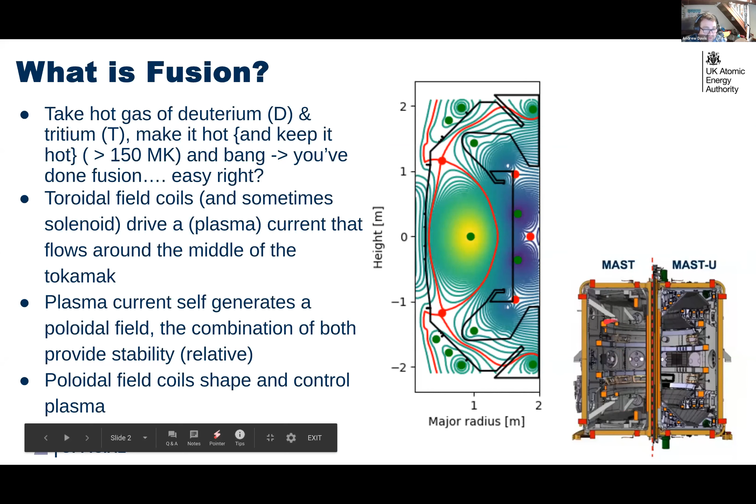The main components are some large toroidal field coils which sit around the tokamak, the poloidal field coils. The combination of both gives you stability and control. The PF coils, these ones here, for example, are used to shape the plasma. Just to give you an example of what one would look like,

if my internet connection is going to behave today, very good.

Ultimately, in a tokamak like MAST, which is a very open configuration, you have poloidal field coils inside the tokamak. You have toroidal field coils outside of it, and the central solenoid down the middle. And any stuff that does escape is going to impinge on these various bits and pieces of wall. Otherwise, the other major engineering component we have is the divertor, which is this big chunk of material, usually at the top or bottom. It can be both in this case. This is known as a double null configuration.

And these components are designed to deal with extremely high heat loads. As a side note, this particular design of divertor is called a Super X divertor. This allows a large expansion of the magnetic flux lines down here, which allows the incoming heat flux to be distributed over a much larger area, which would otherwise be concentrated into a much smaller area, which makes the design of components challenging or impossible.

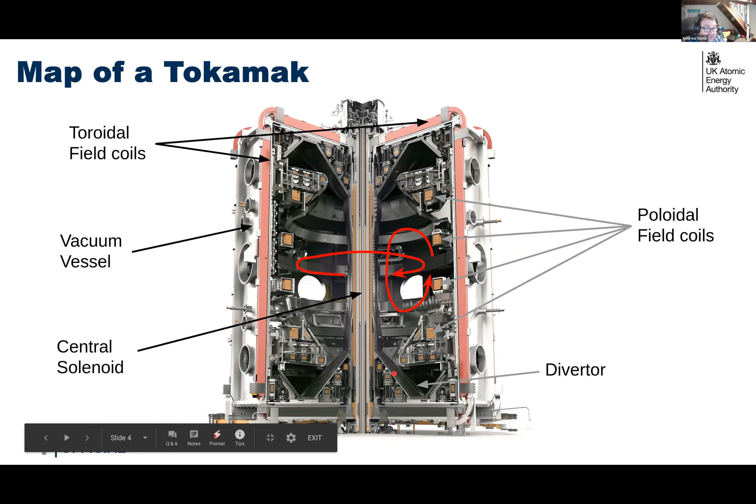But in terms of what is going on, the energy from the plasma mostly comes out in the form of neutrons. These neutrons, despite having a small magnetic moment, do not feel a magnetic field and largely go uninhibited straight into structural materials, where they deposit their heat over a relatively large volume.

That power, ultimately, we want to do something useful with. Unfortunately, because of that savage Carnot, we lose an awful lot of the energy just in lost efficiency. And ultimately, for this fusion power of 2400 megawatts, we end up with 625 megawatts. So really, what we're worrying about here is all this power that's produced that is not going towards electricity has got to go somewhere. And that's largely what we're going to worry about here.

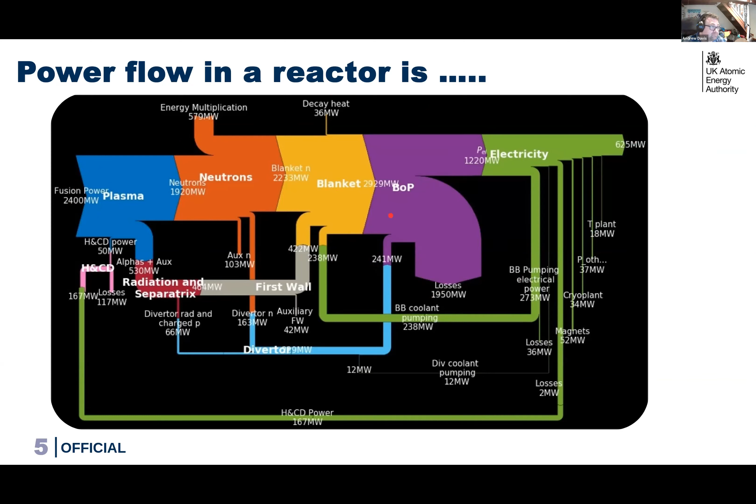We have lots of energy stored in the magnets. In this case, these are the ITER toroidal field coil magnets. You're seeing the large structure for them. They have total current in them upwards of 70 megaamps, forces upwards of half a giganewton. There's an awful lot of crosstalk between the coils.

The coils themselves are superconducting, so they are cooled to about minus 260 something Celsius, to liquid helium temperature, where they are superconducting. They are quite complex in shape. And just as a side note, it took the entire world's superconductor production for something like 8 years to produce them all.

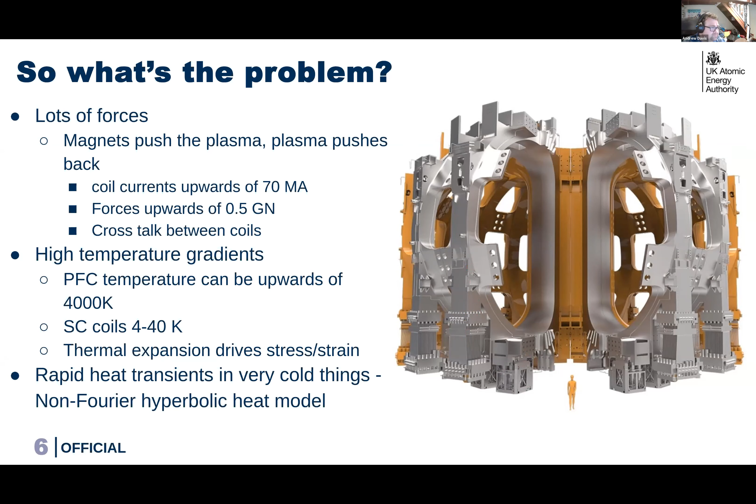At the first wall, somewhere in the middle, where the bright bit is, your plasma-facing components can be at temperatures upwards of 4,000 Kelvin. I'm not sure if Ben mentioned it, but the core of the plasma can be upwards of 150 million Celsius. You get to the first wall where it's about 4,000 Kelvin in certain parts, and then to the superconducting coils, which are at 4 Kelvin.

So a large part of our material problems are driven by stress and strain from thermal expansion. Radiation damage, of course, induces an extra source term in terms of stress. And particularly for magnets, rapid heat transients in very cold things can be a problem, also known as a magnet quench. This is where the superconducting coils lose their superconductivity and become incredibly resistive very quickly, and all that stored energy becomes released as heat. This happens so quickly, we have to rely upon a different heat model, the non-Fourier hyperbolic heat model.

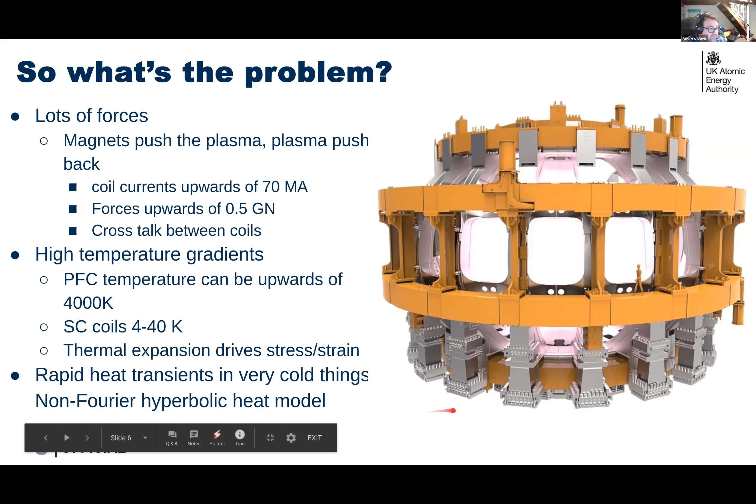Further, we have blankets or liquid metal divertors, if we're feeling really fancy. This leads to problems we have to worry about with MHD. So we have these fairly large, relatively slowly flowing liquid metal concepts, but that's not the only concept. There are other liquid metal concepts we can consider. And certainly one of the more preferable divertor concepts would be a liquid jet of liquid metal. That would be a very nice kind of divertor.

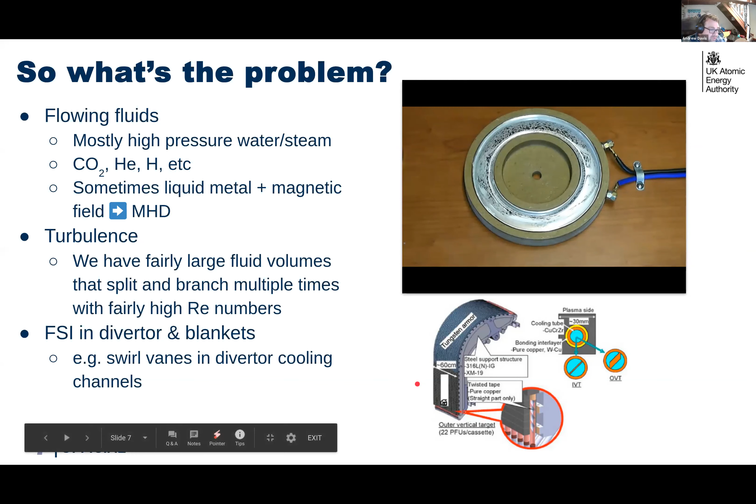Of course, you have to worry about turbulence in terms of fluids. So we have, in some concepts, gas coolant. We have, in some cases, water coolant. In other cases, we have combinations of CO2, helium, liquid metal. And some of these can be quite turbulent flows sometimes. And certainly in the case of some of the more detailed components, we have to worry about fluid structure interaction inside some of these components.

Further, in terms of heat sources, the plasma, of course, releases heat in the form of charged particles and radiation. Charged particles leaking from the edge of the plasma. We have neutrals, which can be fast neutrals, that can impinge on the wall. We're going to have neutrons, X-rays, gamma rays. This tends to be distributed over a large area, or it can be very concentrated. So in the case of the charged particle heat from the plasma on the divertor, we're talking between 5 and 20 megawatts per square metre for survivable scenarios.

But there are a certain number of off-normal scenarios, for example, runaway electrons, which can cause tremendous amounts of energy to be deposited. The electrons end up getting accelerated to energies of about 20 MeV and slow down very quickly when they hit a tungsten wall, but there's also a lot of X-rays produced, which is an awful lot of energy being deposited in one space.

The neutrons, as I mentioned earlier, carry the bulk of the energy from fusion, so 80% of it. This is really quite important because not only are they the source of many of our problems, they also are used to breed the tritium fuel we actually need. So a combination of the radiation damage increases the stress and strain. We also have nuclear heating, which is a source of thermal expansion. And further complications with the neutron interactions can increase that energy deposition from neutrons by a further 50%.

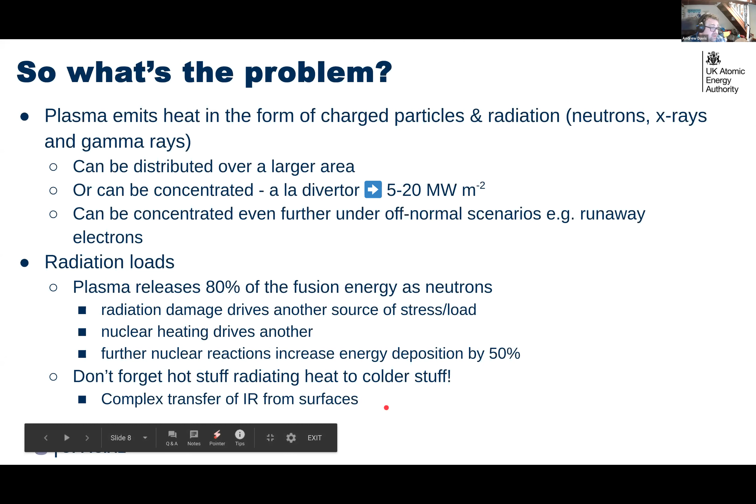And of course, one of the things that's often forgotten about is infrared radiation in the case of emission from a hot surface on the inboard, say, to the outboard. In terms of vacuum, we have other problems. So as Ben mentioned, we can follow the particles explicitly in this case because the vacuum is so good, with a molecular species model, essentially ray tracing, to work out how good our pumping efficiencies are.

We also have to worry about tritium permeation. So although tritium will be released from the plasma sometimes and get stuck to the walls, it will also be produced in the blankets. And really, if we want to be good at predicting how much tritium is produced from a particular design, we need to get good at actually following the tritium where it goes, when it gets stuck into coolant flows, when it gets embedded in materials, and how it comes out.

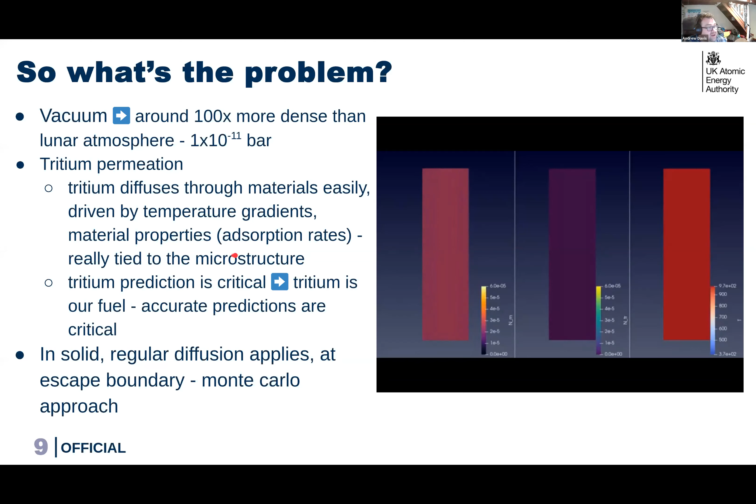Further, we have other material problems, so erosion. We have these interesting tungsten fuzz problems where charged particles, when they impinge on the wall and divertor structures, can produce this tungsten fuzz, which leads to these very nice fingers of tungsten being produced, which is really pretty and interesting. But what this means is you have these gaps in between the tungsten, so the heat transfer coefficient is terrible horizontally, but along the fuzz is quite good. But overall this leads to a drop in heat transfer, and because that drop happens, it actually makes the tungsten fuzz worse.

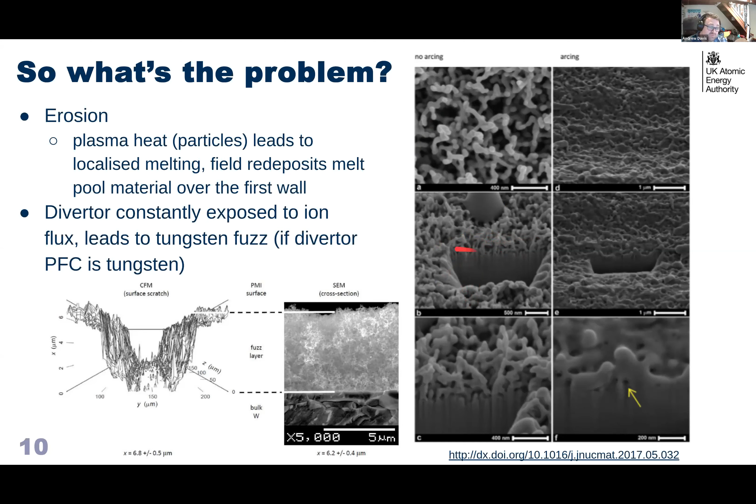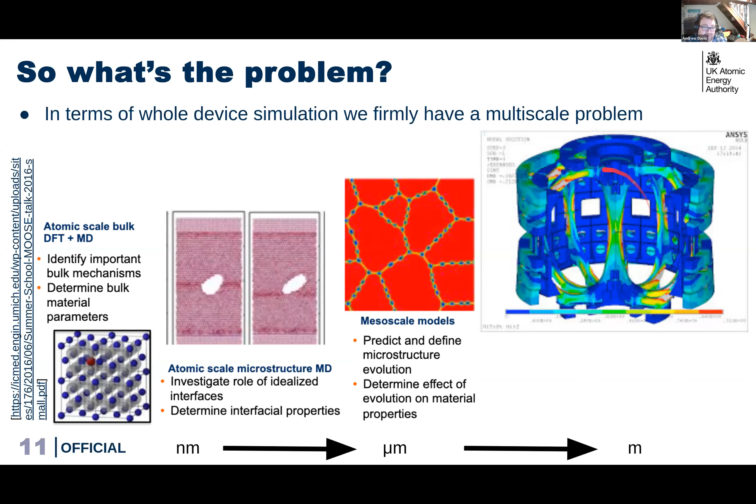So if we want to model the response of the tokamak to the plasma in its entirety, we firmly have a multi-scale problem, going from the atomic level, where neutron interactions can cause interstitials and defects, which then go up to larger models to see how that impacts a particular grain, up to how that grain moves around and impacts the macroscopic phenomena. And as Ben mentioned very kindly, with the plasma itself we also have a number of different scales to worry about, both length and time. So we have a temporal problem as well as a scale problem.

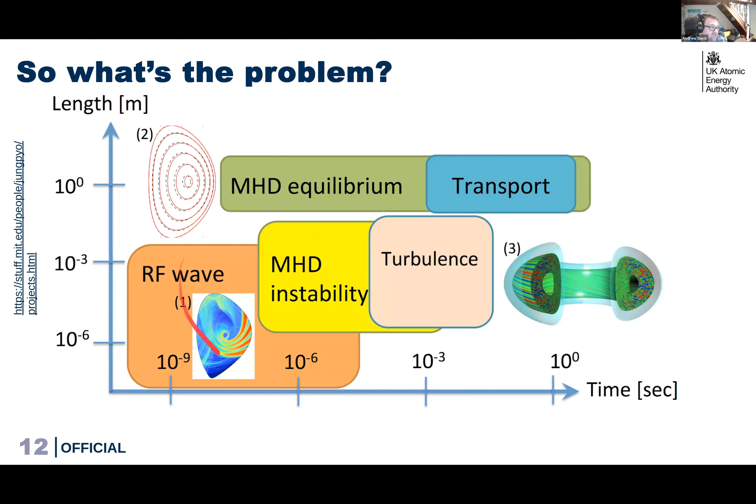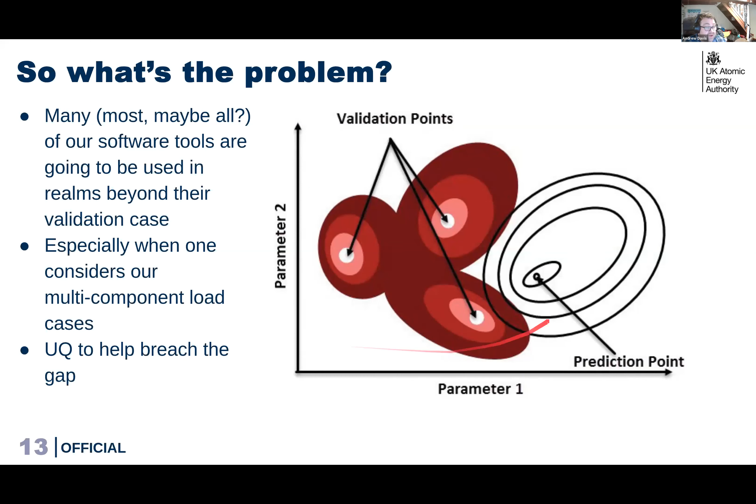A further problem is the traditional set of tools that we use are often used beyond their validation case, whether people realize it or not. Especially if you want to consider the engineering response of the tokamak, many of these tools are used when we have multiple loads, multi-component loads, and they have not undergone the appropriate validation that would be required for a safety-relevant code. And we need to use uncertainty quantification to help bridge these gaps.

So in terms of timelines in between now and 2040, I'm not sure if any of you heard, but we've been running this design study for a tokamak called the STEP project, which is to take a critical look as to whether we can actually build a spherical tokamak. The idea is by the end of 2024, we will have completed tranche 1, which is to have a concept design. There'll then be a further 2 tranches, tranche 2, where we go into detailed design and construction, and then finally the construction phase starting in around 2032 to be running by 2040.

The current plans are for a spherical tokamak-based power plant, and there are a number of siting questions currently ongoing as to where we'd place such a thing. This is a very ambitious timescale. I should note that if I draw on some important lines here, the dashed grey line is the first ITER plasma, just full stop first ITER plasma. This is the first DD plasma, I think, and sometime around 2037 we can expect our first DT plasma.

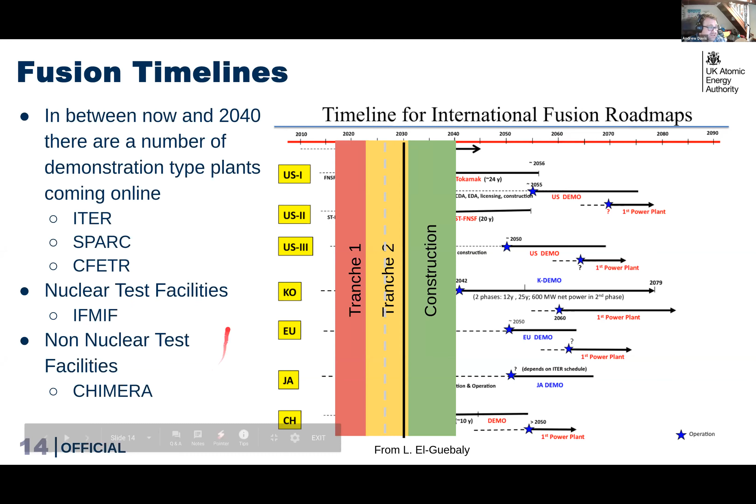So in terms of getting some validation from another tokamak that we can easily get access to, that is going to be a challenge. Of course, coming online soon, maybe SPARC in the next few years, in the next 5 years or so. We'll have access to IFMIF, which is another nuclear test facility, but that's minus a lot of the magnetic loads. We have CHIMERA, which has the magnetic loads, but does not have the nuclear component. So in terms of getting these integrated tests, these integrated validation cases, we are, for want of a word, lacking. So we need to use much more intelligent techniques to be able to actually sample the uncertain space appropriately and get validation data where we can.

So here's an example of a fusion neutron transport problem, a particular benchmark problem. So we have experiment. The blue dots and the purple dots are experimental data points for a particular neutron spectrum for a particular case. And the red lines and the green lines are the range. The green is the average. The red is the range given by all the uncertainty of all the nuclear data. So accounting for all the uncertainty in all the nuclear data, there's still not enough range to cover some of the discrepancies between the experiment and the simulation. So we are also lacking dreadfully in terms of neutron data.

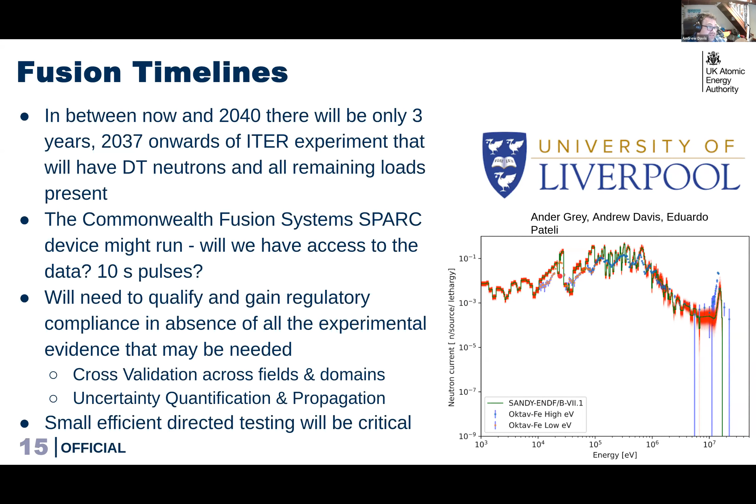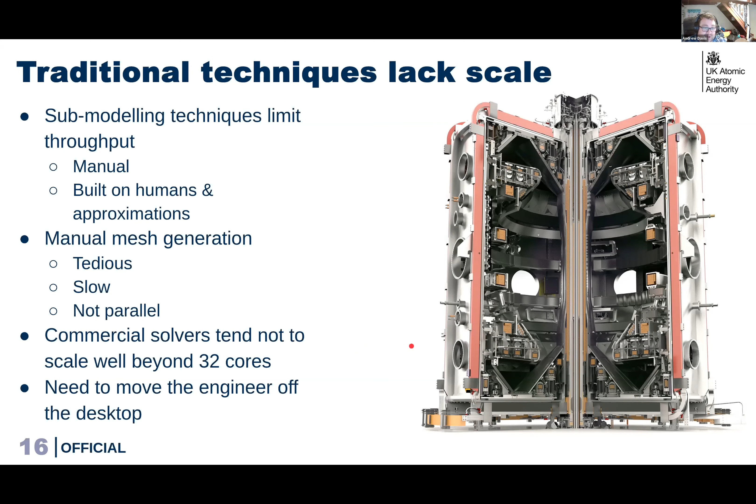So traditionally, the tools that engineers use to design tokamaks are entirely manual and are built on humans and approximations. A human will take a look at a CAD model and will simplify it on the basis of their experience and knowledge. They'll then go off with a traditional mesh generator built into their analysis package, which is going to be tedious, it's slow, and it's not parallel. So immediately, that part of the problem takes a while. It can take months to go from CAD geometry to running problem. And when you do get a running problem, these commercial solvers, which they tend to use, do not scale well beyond 32 cores. So to really make progress on how we can scale up the size of our engineering problems, we have to move the engineer off the desktop into something more scalable.

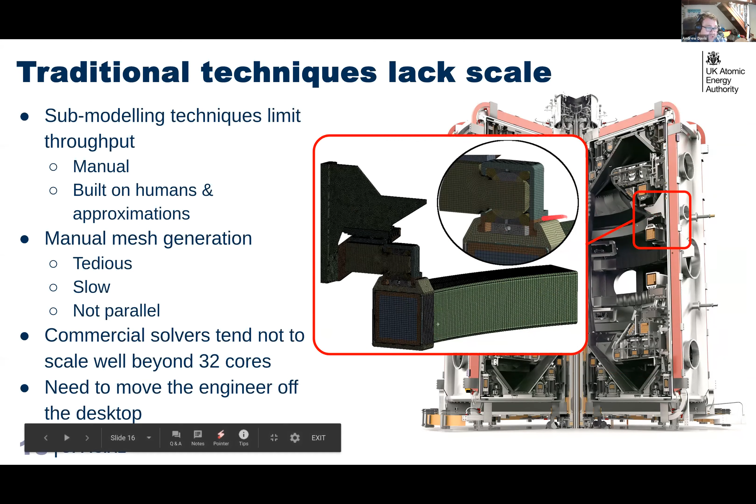If we then also want to go into this more uncertain or data-rich space, we could combine what we could do with a really performant FEA, finite element analysis system, with image-based finite element analysis. Image-based finite element analysis allows you to use neutron or X-ray radiographs to image what components really look like using very, very high-resolution X-ray and neutron imaging. So, for example, this case here allows us to take what the component actually looks like, including all the defects, where there's been brazing failures, where the material has become separated from its joining locations.

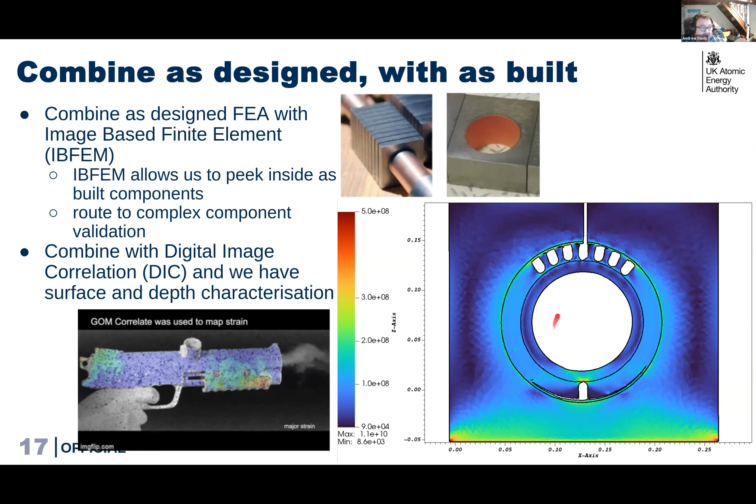If you combine that kind of capability, being able to do this kind of real FEA analysis, with something like this, which is digital image correlation, where you take a component and cover it in this speckle paint. As that speckle moves around, you can determine what the real strain is. And that's what is being displayed on this color plot when this little paintball gun fires. If you combine this kind of experimental data with this kind of simulation data, we're heading towards a really good combination to allow us to go forwards to design stuff well.

However, we already know that going towards as-designed FEA is achievable. We took an ITER port plug and meshed it using Gmsh. We wrote a special tool called PPP, which takes our relatively detailed model, this is not a full detailed CAD model, but it's relatively detailed. The full component, meshed using Gmsh, pre-processed using our special tool, and in about 1.9 hours you go from the CAD model to the mesh without having to do anything. And this is all parallelized.

So we know that we can end up with about 78 million elements. These are all just first order tets, so you can multiply that by factors of a few if you're going to go to second order tets, and then if we're going to represent that using a second order refinement in terms of the variables, we can end up with quite a large number of elements.

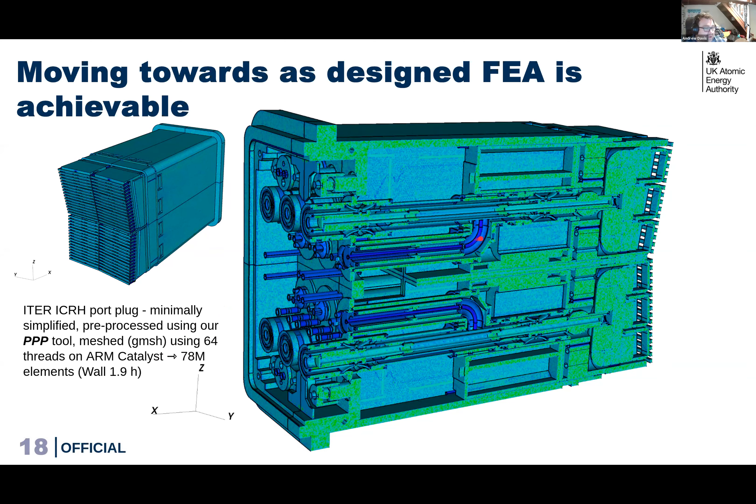But we already know from our colleagues at Cambridge that this is not unreasonable, and we should be heading towards this anyway. We already know from work done by Chris Richardson and Garth that getting scalable thermomechanical calculations is entirely possible, ending up with the order of 10 to the 9 tets on 25,000 cores. This is not to be sniffed at.

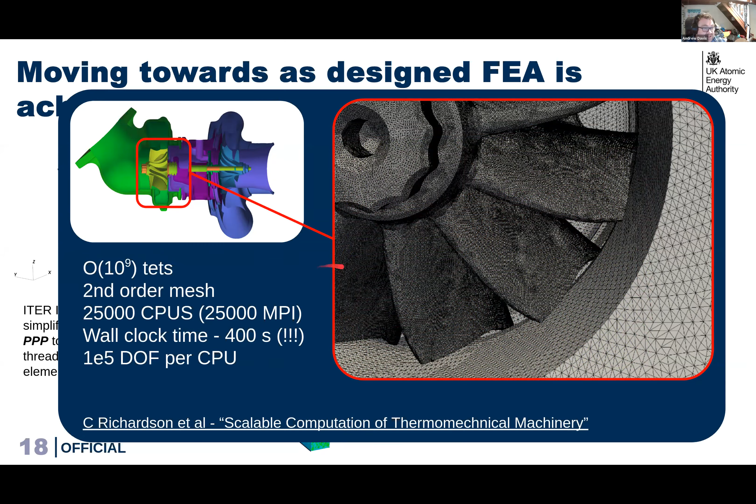There is, of course, a role for machine learning and AI, and we have lots of problems that are ripe for the deployment of machine learning and AI, particularly in terms of simulation and parameter space exploration. Our main bottlenecks in getting simulations going are mostly repairing and simplifying the CAD geometry. If you could really get machine learning and AI into that part of life, that would turn around our lives, I think.

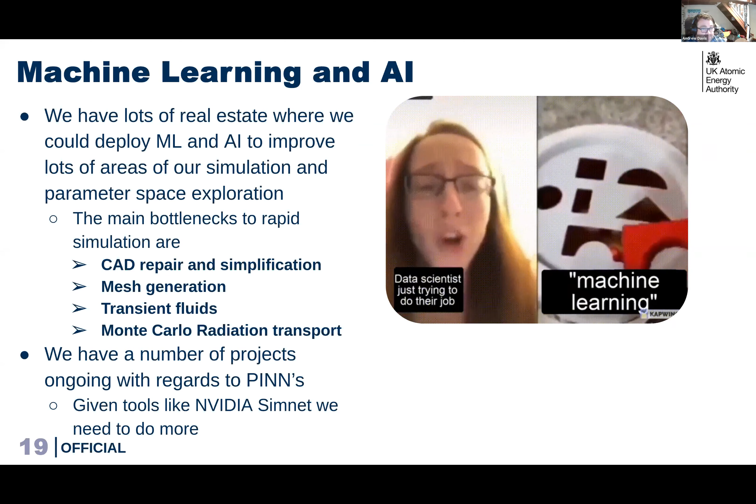Mesh generation is another good place where I'd love to see the application of machine learning and AI. Same for transient fluid simulation and Monte Carlo radiation transport. Those two parts of our simulation workflows are particularly slow in comparison to the rest of the FEA. We do have a number of ongoing projects for physics-informed neural networks, and there's been some recent interest in Nvidia SimNet.

If we combine everything we talked about, the ability to do large-scale FEA analysis and machine learning and AI, we head towards a world where we can really think about doing physics-complete digital twins, where we can really show that we actually understand all the phenomena that are going on and predict that in comparison to real life.

Here's an ongoing example from the University of Swansea, where they are going to use machine learning and AI to predict simulation results between experiments, so you don't have to do the simulations in between. And in the cases where the difference between prediction and experiment grows large, they would use more simulations to fill in the gaps.

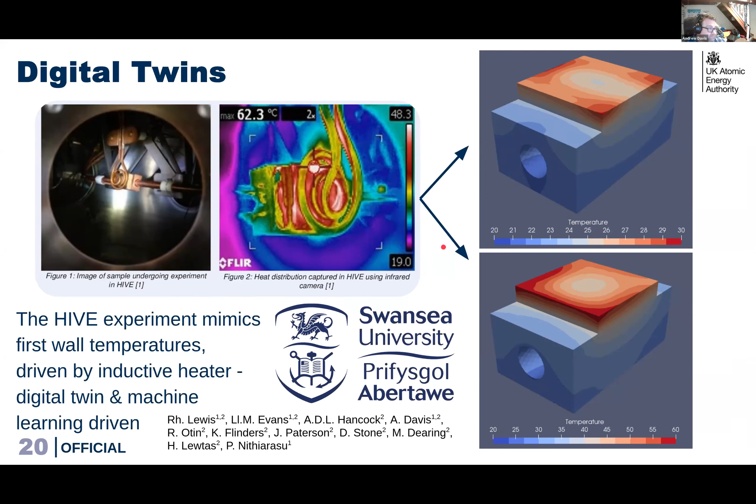So if we do want to head towards a world where we're going to simulate full physics-complete systems, we need this large, scalable FEA framework. And it's got to cover many things: computational solid mechanics, including contact and fracture mechanics, computational chemistry, electromagnetics, fluid dynamics, radiation transport. The way I imagine it is if you imagine a fusion reactor as a bunch of large stainless steel Lego bricks, everything that could happen to that Lego brick we more or less care about.

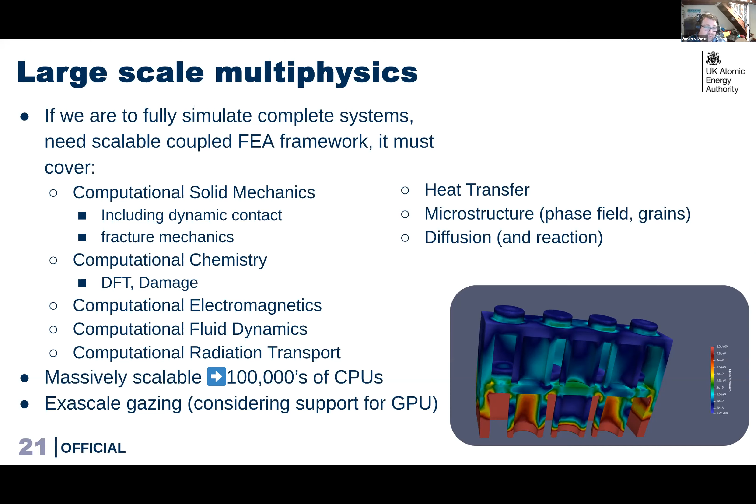We do really want to consider that it needs to be highly scalable, because if we head towards full reactors, that needs to be scalable. And we need to gaze at the exascale. We necessarily need more physics than most frameworks allow. But we do want to be thinking about how we're going to move this across to the exascale when it arrives.

So because we have this more holistic view of how we stick stuff together, we have lots of physics to stick in. We've been experimenting with tightly coupled frameworks rather than a federated model. And we do have a number of cases that warrant tight coupling, for example, this heat problem in superconducting magnets. Still figuring out what scales, what tools, what physics. But one of the key things we already know is that the engineer will be limited by where they can deploy their software. So open source, open licensing is absolutely critical for anything that we do.

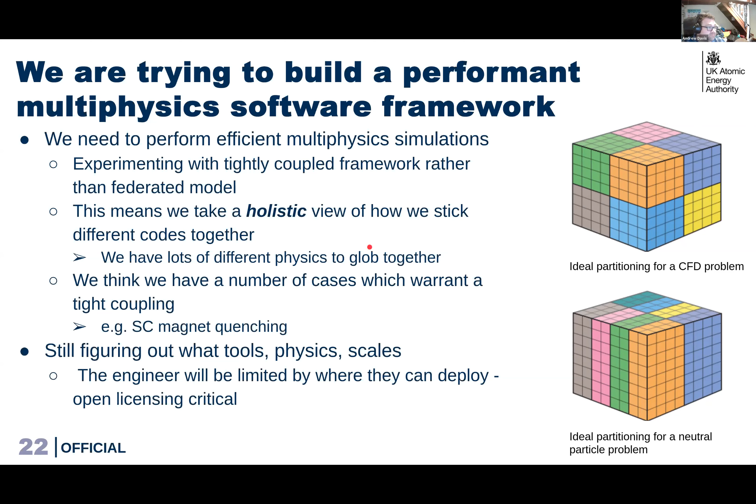We did some initial investigations. A chap who works with us called Alex Dubas looked at a range of different FEA packages, finite element libraries. We had to start somewhere. So we tried to start off scientifically by comparing performance and stuff like that. But ultimately, after comparing 37 different packages, we had to down-select on how easy it was to use, how much documentation there is, software quality, and scaling is obviously important. Memory usage is important. We ended up looking at three different libraries: MFEM, MOOSE, and DOLFIN.

And in the end, because on the STEP program we have to be application driven, we perhaps didn't take the most scalable solution. I went with MOOSE because it has much more physics that is ready to go and ready to scale, and for a number of other reasons: scale, multi-scale, other bits and pieces. That's not to say that we aren't going to consider other options in the future, but that's what we're using currently.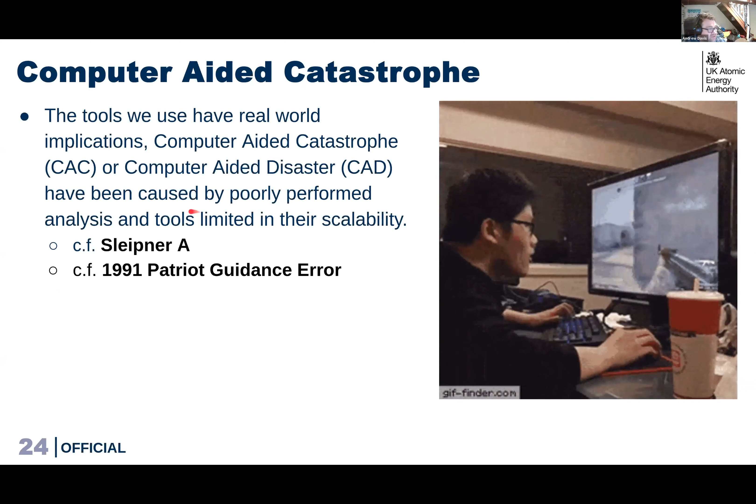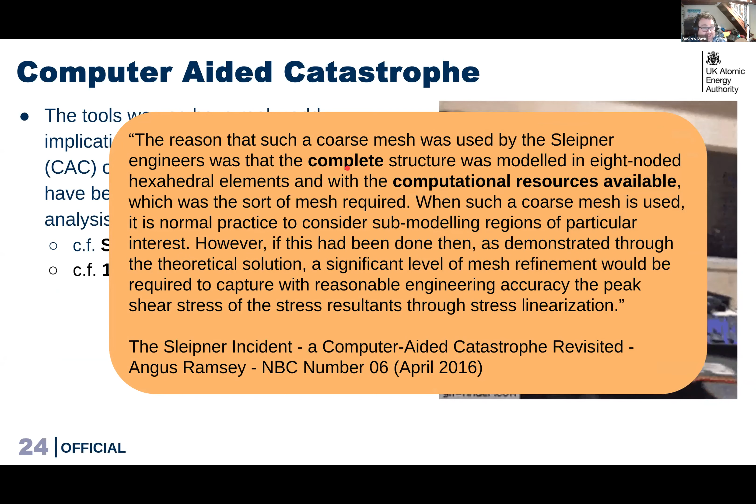So another argument for scalable FEA systems would be the Sleipner A disaster, which was caused by a blockage in terms of computational resources. Traditionally, people would use submodeling to solve one of the particular problems with this disaster, but they didn't. And if instead they had access to a much more scalable solution, this could have all been bypassed.

So we've been looking at a bunch of problems. So in this case, this is a blanket pin concept of a breeding module. Here we're looking at the temperature and velocity induced in the cooling gas to see what happens as we ramp up this flow down the middle. And it turns out the shape of this nozzle region is important. And we did an optimization study to look at a number of different setups.

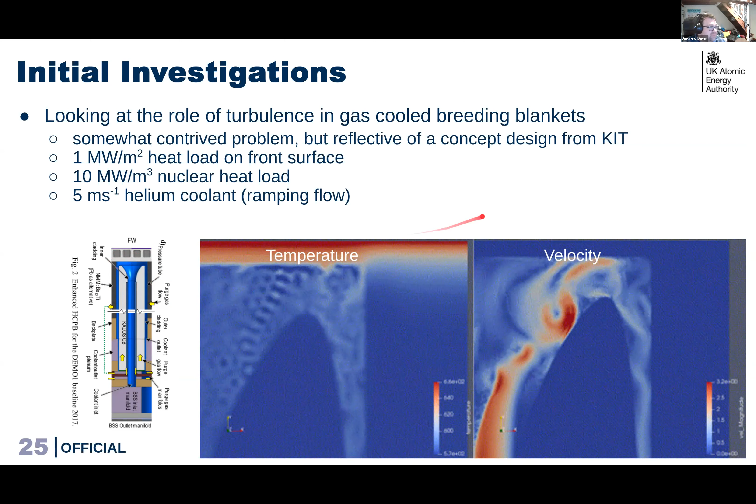Sorry, 3 minutes left over. Okay, I think I'm nearly there.

Obviously the parallel scaling is important, but what we have found immediately upon trialing out real problems is that the physics and the preconditioning really limit scalability. So when we couple in some really non-linear physics, which turns out is what most real problems are, it really hampers your scalability, especially when you make your problems all temperature dependent.

We've been using MOOSE, which is based on libMesh, which then takes this FE assembly and sends it off to PETSc. And there is a GPU-enabled version of PETSc in progress. So the hope is that it will be relatively easy to hook into those benefits. We have found that for very tightly coupled problems, preconditioning is a challenge, but the field split preconditioning really helps here. It makes problems actually quite tractable.

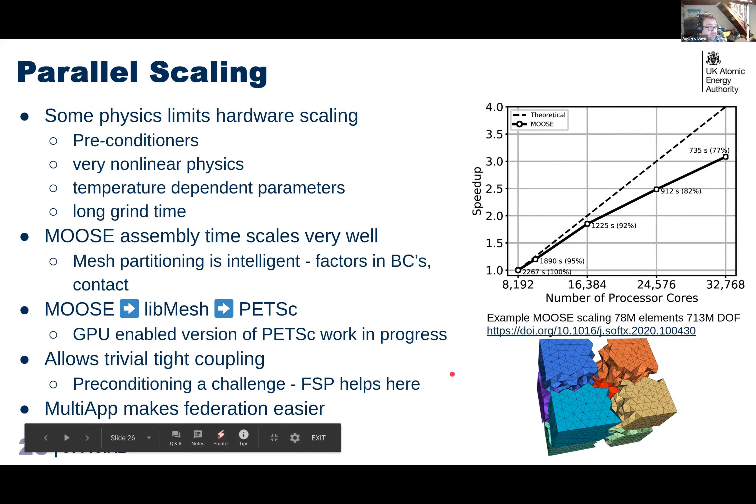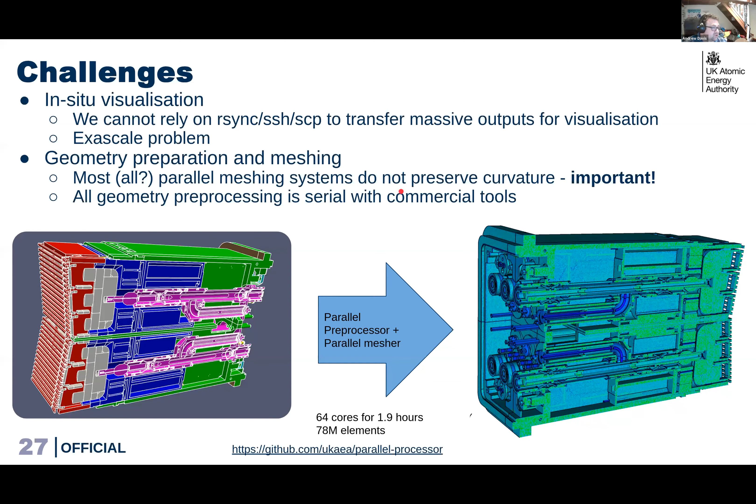In terms of problems, as we go to bigger problem sizes, this is no different to anybody else in the exascale region. We need to rely upon in situ visualization, because transferring some of these huge meshes with tens of thousands of time steps, shifting data back and forth, is not something that we can continue to do. And geometry preparation: if we could do something about speeding that up, that would really make our life a lot easier.

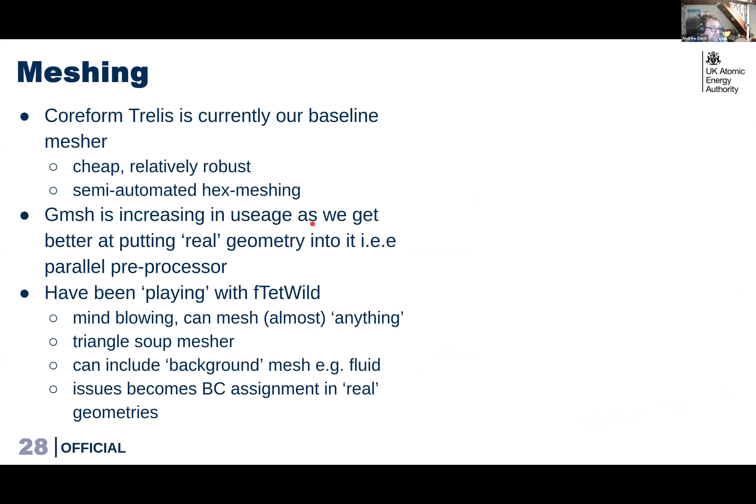In terms of meshing, we've been using the Coreform Trelis mesher. Basically, that's the starting point for compatibility with other tools. Gmsh we're getting better with, and now we can get in real geometry. That's really good. But the one that still blows my mind is a library called TetWild, fTetWild. Its tagline is we can mesh anything.

So it took 10,000 things from the 3D printing library Thingiverse and meshed them all successfully with something like 99.999% success rate. And the ones that failed just needed more memory. It was really quite incredible. You can just throw these triangle soups at it and it meshes. So I took one of my worst problems, and it failed, of course, but it's because the STL is not really valid. But it can do some really interesting things, really quite well.

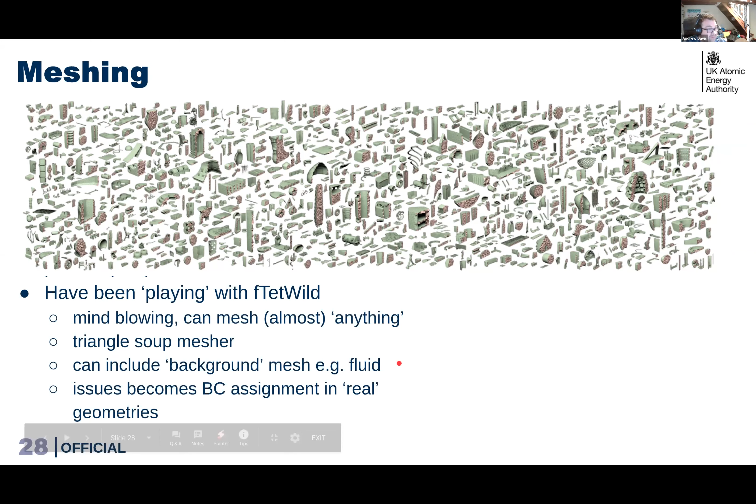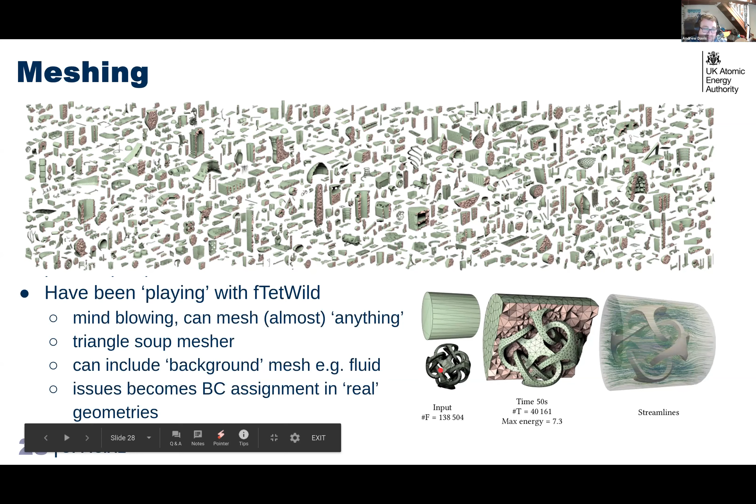So, for example, you can take your STL input and put a background mesh around it to turn it into a fluid problem. However, going into this view of meshing, the real problem becomes boundary condition assignment. When you've got complex boundary conditions for contact or for heat transfer coefficients, it becomes a real pain.

That being said, there is obviously some really interesting stuff coming down the academic pipeline. So isogeometrics is obviously super interesting because that allows us to increase our scale dramatically. Spectral HP-based finite element, again, super interesting. I think if the two were combined, that would give us a really nice framework for the future. But unfortunately, on the STEP program, we have to be pragmatic, and therefore we have to go with what's most capable now, which is why we went down the line of MOOSE.

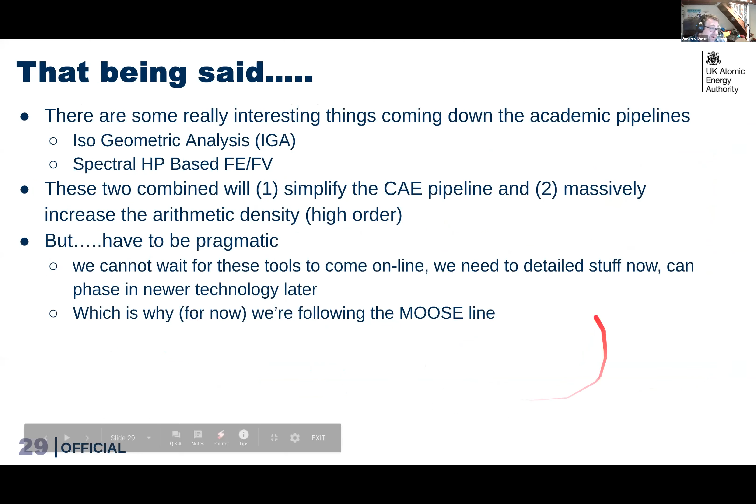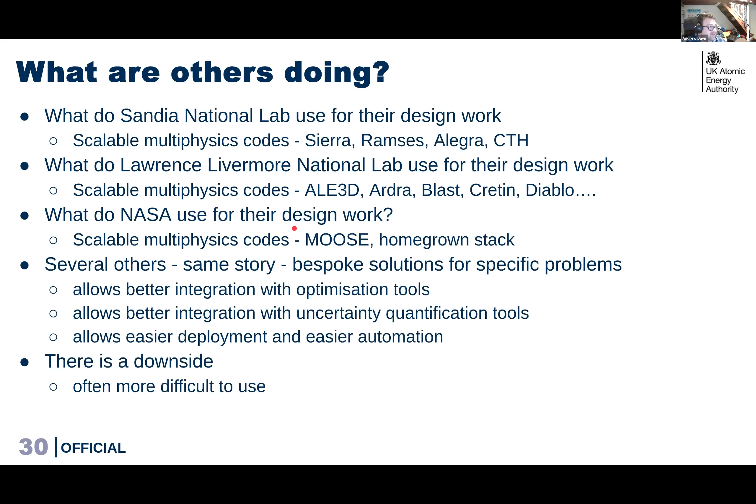Everyone else is also thinking along these lines about scalability, so that makes it reassuring. Not going to cut to that too much. So this was possible 5 years ago, to simulate a whole fission reactor core. We need to be able to take that and light a fire under that.

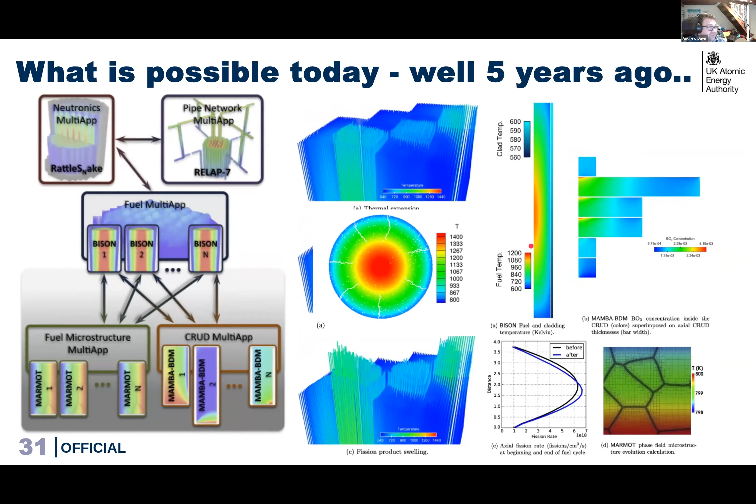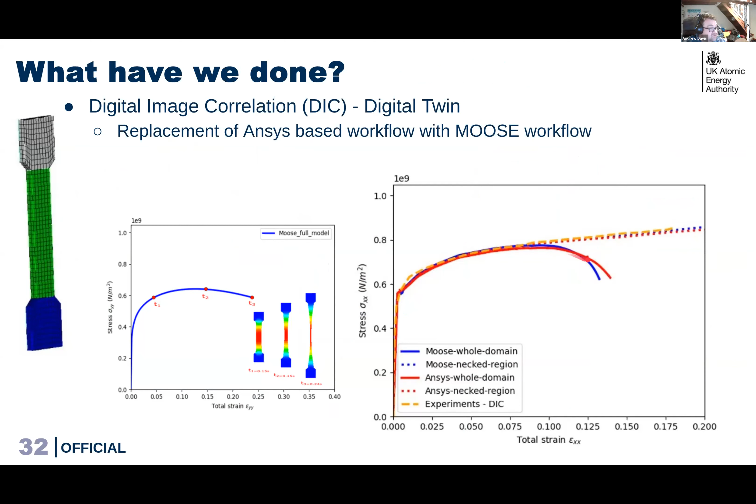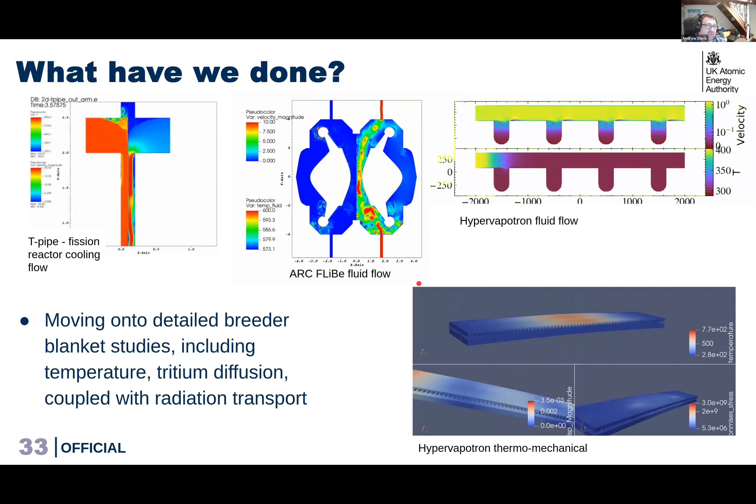So some examples: we've been doing stress strain calculations for digital image correlation to show that, first of all, we get the same results as ANSYS, and that we also can show a more scalable result than they do. We've been doing fluid flow problems in the ARC reactor, reactor physics fluid flow problems, looking at hypervapotrons, a whole range of things. But the next real steps are to fully couple this with radiation transport.

So what's next? We need to start thinking about how we can talk to the plasma physics, because of course the device does not exist in isolation to the plasma, nor the plasma to the device. So how we can couple those things together is going to be interesting. How we can bring this together with the detailed blanket studies, because we really have to care about where tritium goes. And that's going to be a coupled temperature, mechanical, tritium, radiation problem. And then ultimately heading towards large-scale digital twins of MAST Upgrade, HIVE, and H3AT.

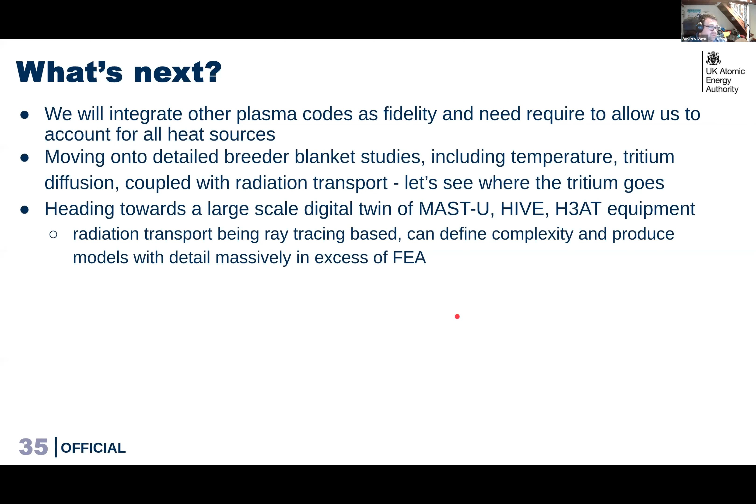And that's all I'm going to say. So hopefully that was in time, and hopefully you have questions.